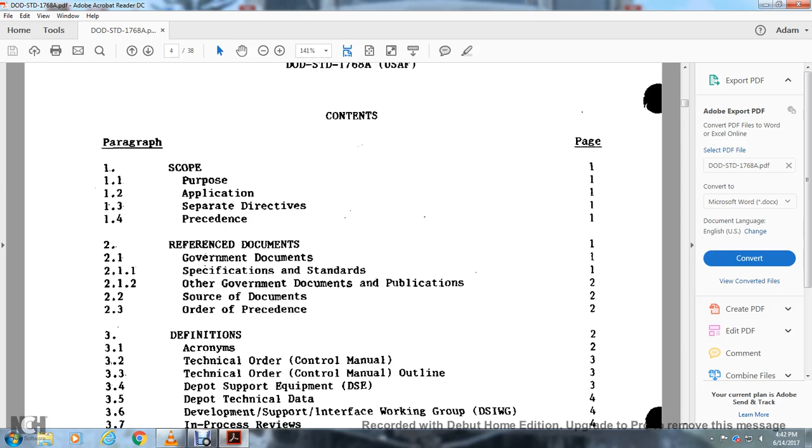Acronyms: Technical Order Control Manual, Technical Order Control Manual Outline, Depot Support Equipment, Depot Technical Data Development Support Interface Working Group, In-Process Reviews, Overhaul, Republication Reviews, Repair, Source Data, Support Data, Engineering Data, Technical Orders, Supplemental Data, Commercial Manuals, Technical Order Support Equipment, Technical Order Management Agency, Testing Station, Validation, Verification.

Section 4, General Requirements: Integrated Data Concept, Use of other TOs, Exchanging Source Data, Structuralizing, Specialized Packaging, Documentation Development, Interim Procedures, Interim Product Development, System Requirements and Analysis, Documentation, Quality Assurance, Configuration Accountability, Safety Critical Procedures, Air Force Occupational Safety and Health Requirements, Development and Process, Relationship with Depot.

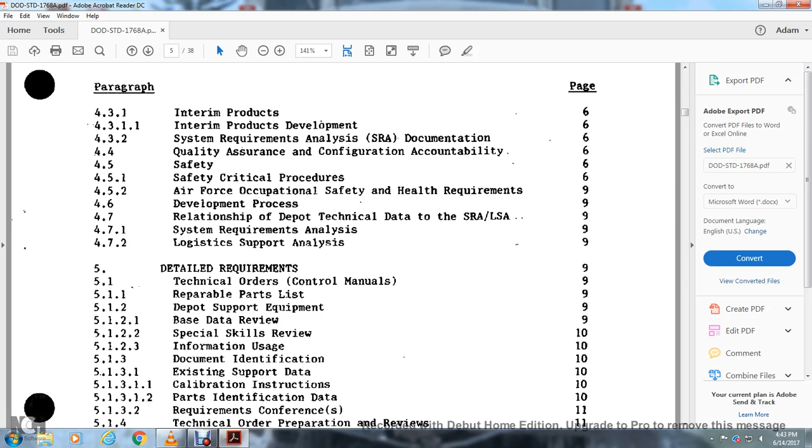Technical data for the SRA, LSA, System Requirements and Analysis, and Logistics Support Analysis. Detailed requirements: Technical Orders, Part Repairable Part List, Depot Support Equipment Base Data Review, the Special Skills Review, Information Usage, Document Identification, Existing Supporting Data, Calibration Instructions, Part Identification Data, the Requirements Conferences.

Technical order preparation: review of the Technical Order Control Manual and Outline, Technical Orders Control Manual, Technical Order Supplemental Data, Depot Technical Data Reviews, Validation, Verification of the Depot Technical Data, Validation, Correction of Deficiencies, Validation Certification, Verification, Technical Order Verification, Recommendation, Use of the Draft Copy, Verification Schedule, Depot Technical Data Verification, Complete Record Correction of the Deficiency, Verification, Approval.

Configuration control, preparation for delivery. Section 6, Notes: Intended use of the data requirement, subject term keyword listings, changes from previous issues.

Appendix A: Scope, purposes of applicability, reference documents, definitions, general requirements, content, type of data, extent of coverage and automation capability, data requirements, format, title page, list of effective pages, list and status of data to be verified, the TO, equipment configuration status record, C-page, table of contents, Section 1 Introduction, Section 2 Depot Functional Flow Charts.

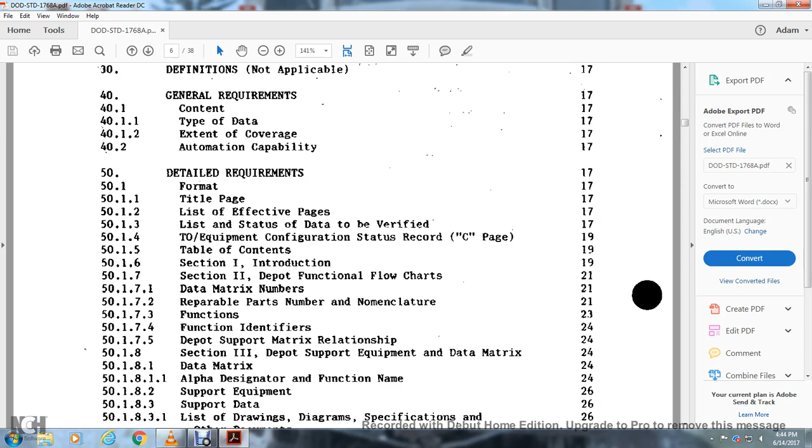Depot data matrix number, data repairable parts number, the nomenclature, function identifiers, depot support matrix relationship, Section 3 Depot Support Equipment, Data Matrix, Alpha Designator, Function Name, Support Equipment and Support Data, Listing of the Drawing, Diagram, Specification, and other Documents.

Figure 1, Depot Data Development Process; Depot Data Verification Completion Record; Depot Data Verification Recommendation. Example B: page list of data verified. Example C: Technical Order versus Equipment Configuration Accountability Record.

Example of Depot Functional Flow Chart. Example of Depot Support Matrix. Example of the Data Status List. Example of the Repairable Part Index. Tables: Depot Repairable List of Support Equipment, Depot Support Matrix Abbreviations.

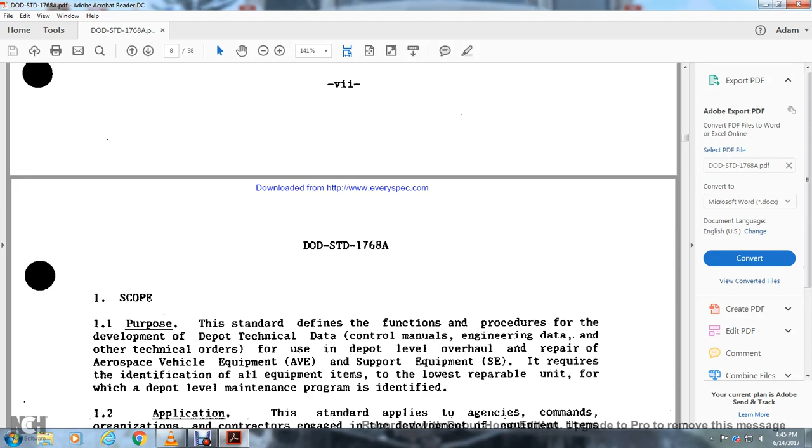Our Department of Defense Standard 1768A. Purpose: The standard defines the function and provides procedure for the development of the depot technical data, the manuals, the engineering data, and other technical orders.

For the use of the depot level to overhaul repairs of aerospace vehicle equipment and support equipment. It requires identifying all the equipment items in the lowest repairable unit for which a depot level maintenance program is identified.

Application of the standard: it applies with the agency's command or organization contracted to engage with the development of equipment items which require depot-level overhaul repair.

Separate directive: Separate directive operating procedures may be utilized to expand and implement specific requirements of the standard. This standard shall also apply to the procuring agency, as all procuring requirements shall clearly detail the intent with the integrated data concept.

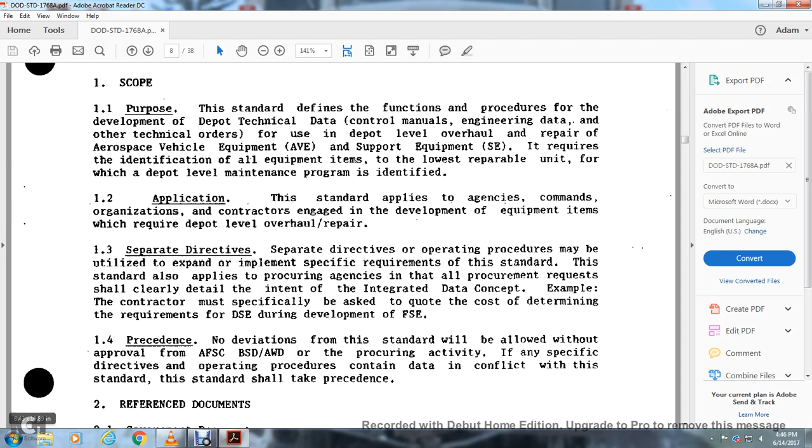For example, the contractor must specifically be asked to quote the cost of determining the requirements for the DSE and during the development of the FSE. Precedence: no deviation from the standard will be allowed without the approval of the Air Force AFSC, BSD, AWD, or the procuring activity. If any of the specific directives or operating procedures contain data in conflict with the standard, the standard shall take precedence.

Reference documents, government documents, 2.1.1, specification and standards. Unless otherwise specified, the following specifications and standards of the issue listed in the Department of Defense Index of Specifications and Standards specified in the solicitation form a part of this standard to the extent specified herein. The specifications: Military M-

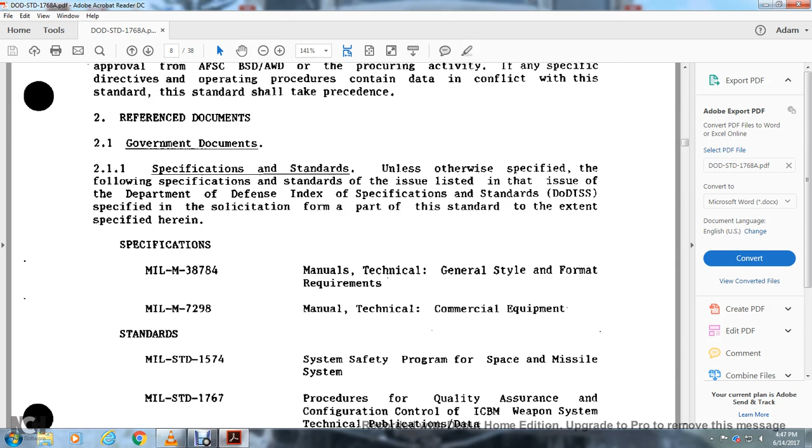38784, Manual Technical General Style and Format Requirements. MIL-M-7298, Manual Technical Commercial Equipment Standard. MIL-STD-1574, Safety Systems, Safety Programs for Space and Missile Systems. Military Standard 1767, Procedure for the Quality Assurance Configuration Control of the ICBM Weapon System Technical Publication Data.

Other government documents and publications: the following other government documents and drawings form a part of this standard to the extent specified herein. SAMSO Standard 77-6, System Requirements Analysis Program of the MX Weapon System. SAMSO Standard 79-1, Integrated System Safety Program for the MX Program. AFLC-R 66-17, The Depot Maintenance Support Plan.

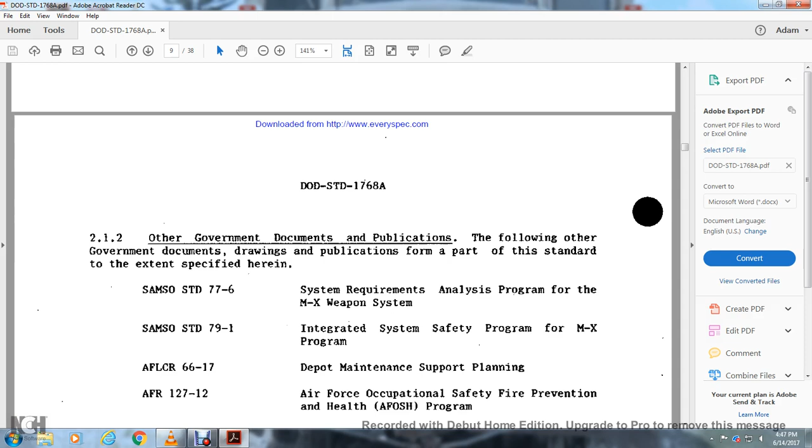AFR 127-12, The Air Force Occupational Safety and Fire Prevention Health Program. TO 00-5-1, Air Force Technical Order System. TO 00-5-2, Technical Order Distribution System. TO 00-2-1, Preventive Maintenance Program General Requirements and Procedures.

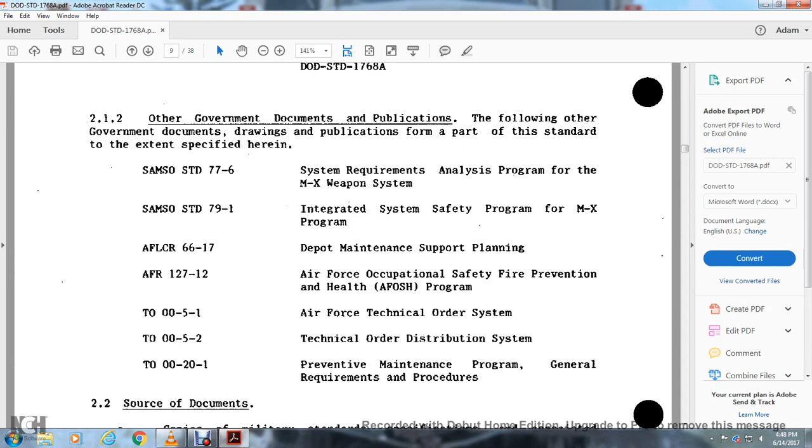Source for the documents: copies of the military standards and specifications associated with the Department of Defense Index of Specifications and Standards are available at the Department of Defense single stock point, with the Commanding Officer, Naval Publications and Forms Center, at 5801 Tabor Avenue, Philadelphia, Pennsylvania 19120. Copies of industry association documents should be obtained from the sponsoring industry association.

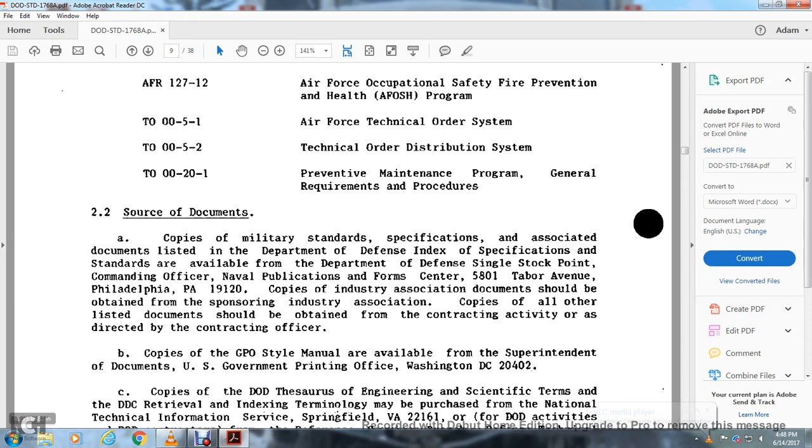Copies of all other listed documents should be obtained from the contracting activity as directed by the contracting officer. Copies of the GPO Style Manual are available from the Superintendent of Documents, U.S. Government Printing Office, Washington, D.C. 20402. Copies of the DoD Thesaurus of Engineering and Scientific Terms, the DDC Retrieval and Indexing Terminology, may be purchased from

the National Technical Information Service, Springfield, Virginia 22161. For DoD activities, DoD contractors, from the Reference Services Branch, Defense Technical Information Center, Cameron Station, Alexandria, Virginia 22304-6145.

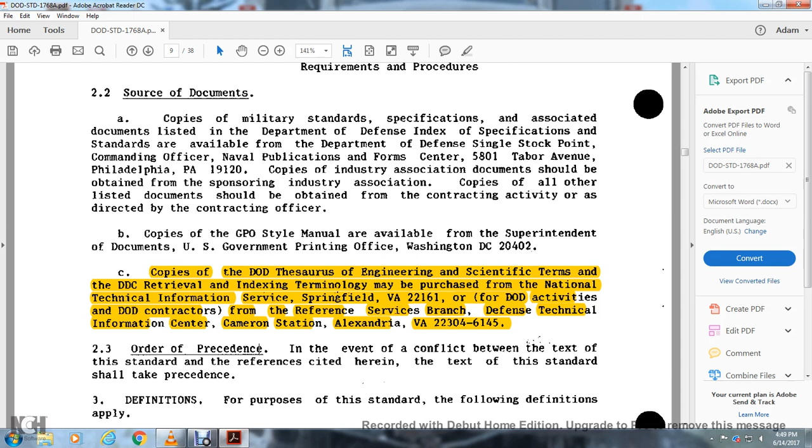Order of Precedence: in the event of a conflict between the text of this standard and the references cited herein, the text of the standard shall take precedence.

Alright, let me go. I'm just highlighting some of this, like...

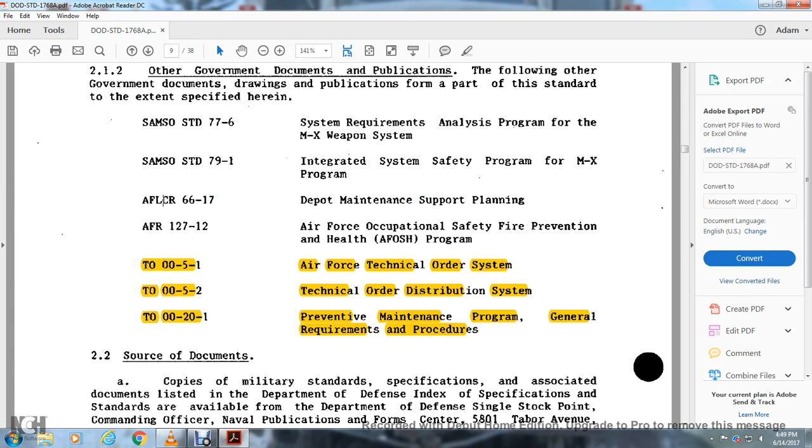Definitions: for the purpose of the standard, the following definitions apply. Acronyms: the following acronyms are used in this document.

A&CO TA, Assembly and Checkout Technical Analysis. AECO, Advanced Engineering Change Order. AFLC, Air Force Logistics Command. AFOSH, Air Force Occupational Safety and Health. AFSC, Air Force Systems Command. AFOTEC, Air Force Operational Test and Evaluation Center. ALC, Air Logistics Center. AVE, Aerospace Vehicle Equipment.

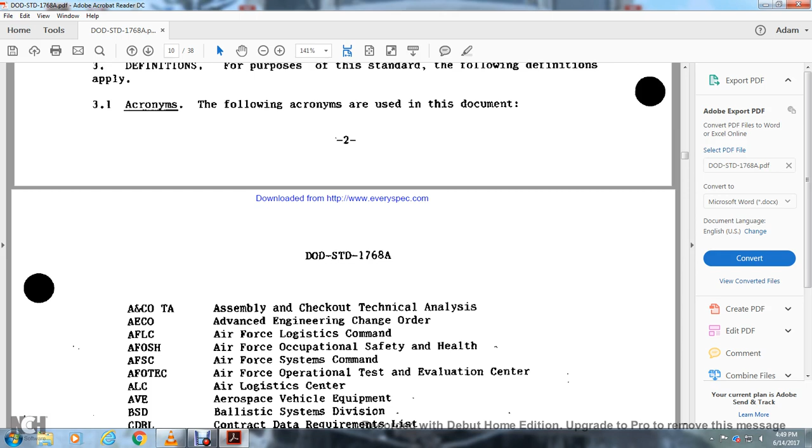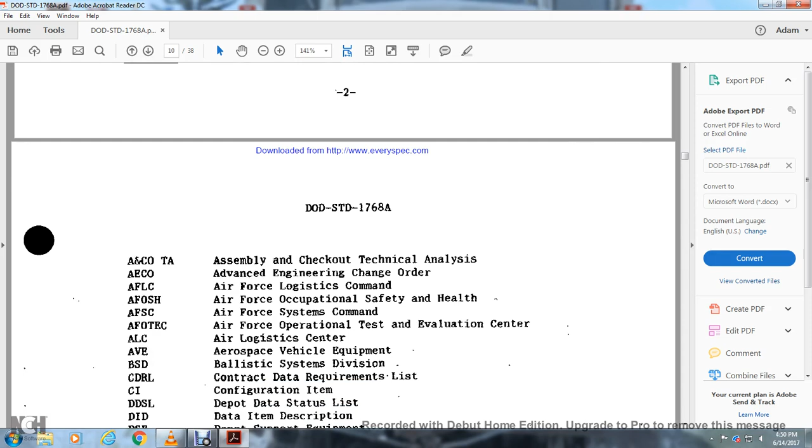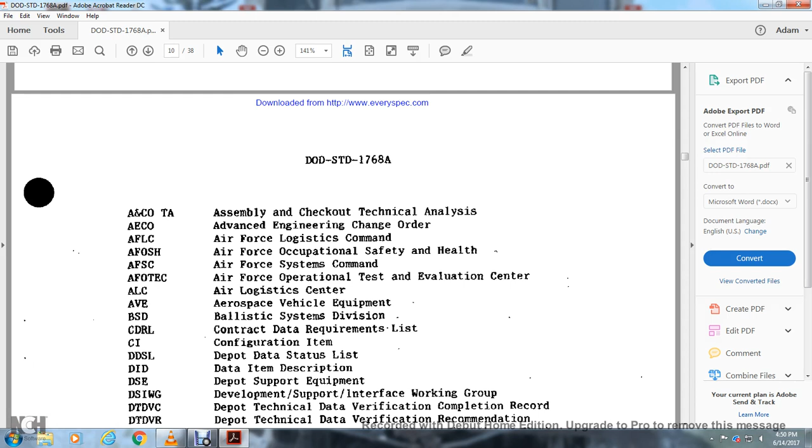BSD, Ballistic Systems Division. CDRL, Contract Data Requirements List. CI, Configuration Item. DDSL, Depot Data Status List. DID, Data Item Description. DSE, Depot Support Equipment. DSIWG, Development Support Interface Working Group. DTDVC, Depot Technical Data Verification Completion record. DTDVR, Depot Technical Data Verification Recommendation. ECP/ECN, Engineering Change Proposal, Engineering Change Notice.

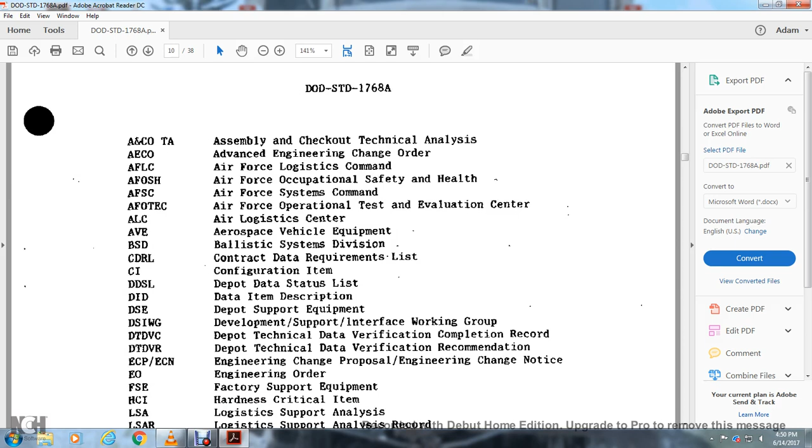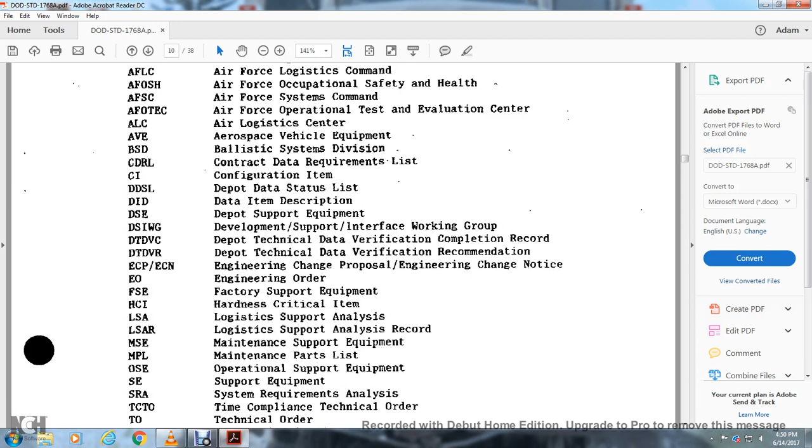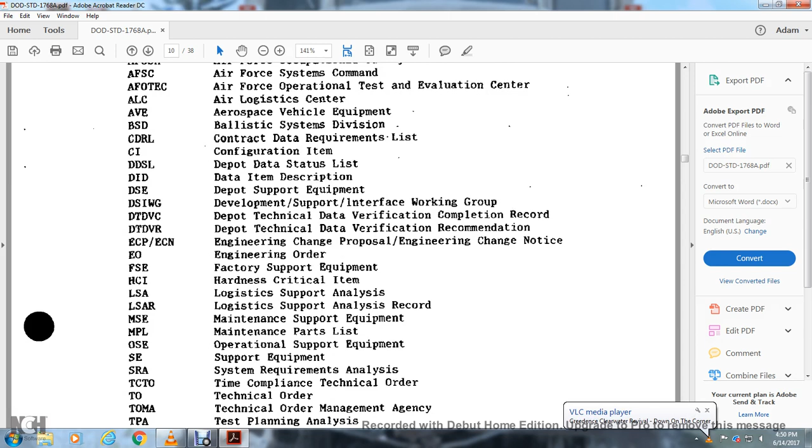EO, Engineering Order. FSE, Factory Support Equipment. HCI, Hardness Critical Item. LSA, Logistics Support Analysis. LSAR, Logistics Support Analysis Record. MSE, Maintenance Support Equipment. MPL, Maintenance Parts List. OSE, Operational Support Equipment. SE, Support Equipment. SRA, System Requirements Analysis. TCTO, Time Compliance Technical Order. TO, Technical Order. TOMA, Technical Order Management Agency. TPA, Test Planning Analysis. TRC, Technology Repair Center.

TOCM, Technical Order Control Manual. The technical order prepared according to the standard MIL-M-38784 for incorporating support data, with the Technical Order Control Manual identifying the overhaul, all depot overhaul, and repair of the tasks required, with the preferred sequence of support equipment and special tools, task equipment, consumables, and a list of other support data required to accomplish each of the tasks, providing a means of determining the configuration of the support data and equipment.

Technical Order Control Manual outline: an outline is a method of organizing the material content of the control manual into a logical, sequential manner by section and paragraph breakdown prior to finalization into a written and printed document. Depot support equipment: classes of equipment, excluding common hand tools, necessary to overhaul, repair, and test contractor hardware to the lowest repairable unit. This includes commercial equipment.

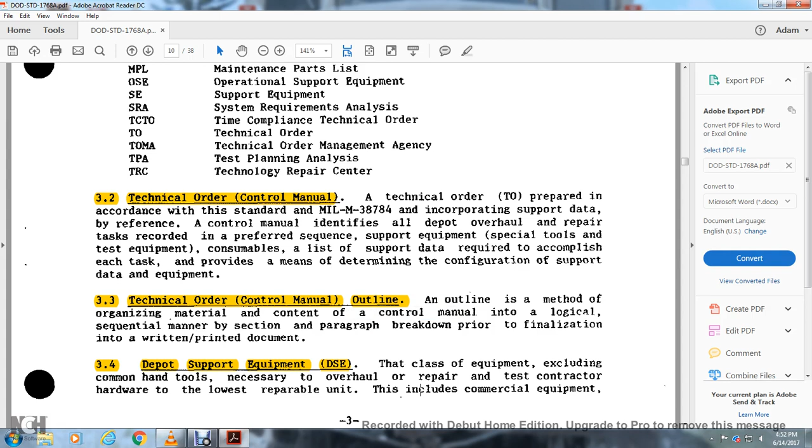This includes commercial equipment as well as equipment specifically designed or built to fulfill the particular depot overhaul repair function. The depot technical data documentation control manual covers the supplemental data, engineering data, and other technical orders, used during the depot level maintenance on AVE and SE. This control manual will identify the function of the repair, install, calibrate, etc. to be performed with the AVE or SE, directing the technician to the appropriate data to perform the function.

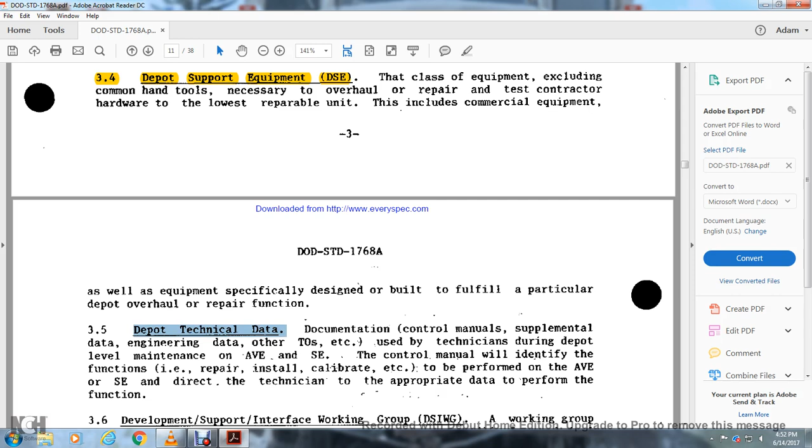The Development Support Interface Working Group, the DSIWG, consists of representatives of each agency responsible for technical development, established by the Technical Order Management Agency. The plan and schedule coordinate the technical publication data and the development acquisition. The DSIWG will establish the operating procedure to develop and monitor the technical publication program schedule, continuously monitoring program events to ensure technical publication data are scheduled and available to support various program events.

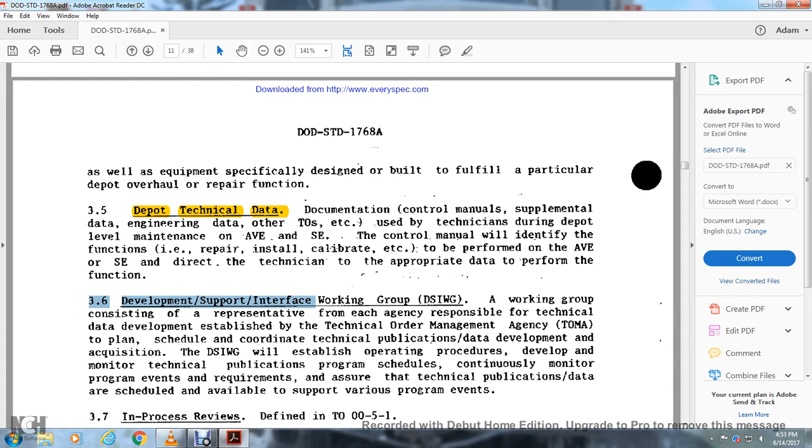In-process reviews are defined in TO 0051. Overhauls are defined in TO 00201. Prepublication reviews are in TO 0051. Repair is defined in TO 00201.

311, support source data. The documentation developed with the contractor for support equipment and items developed with contractor source data may be standalone, may incorporate other documentation when the hardware is integrated or attached, or otherwise become part of the equipment support. 312, support data, 312.1 engineering data delivered to the Air Force, prepared by the contractor to support hardware manufactured, developed, and produced by the contractor.

This includes current engineering drawings with schematic diagrams, logic diagrams, process specifications, testing specifications, vendor development drawings, procedures, and acceptance procedures. These data are in a form of existing data developed in support of the contractor requirements.

Technical order supplemental data: the data from the contractor, where it has been determined there is no existing data or existing data is determined inadequate. Reference 5143. Such data contains the title, the list of effective pages, and table of contents.

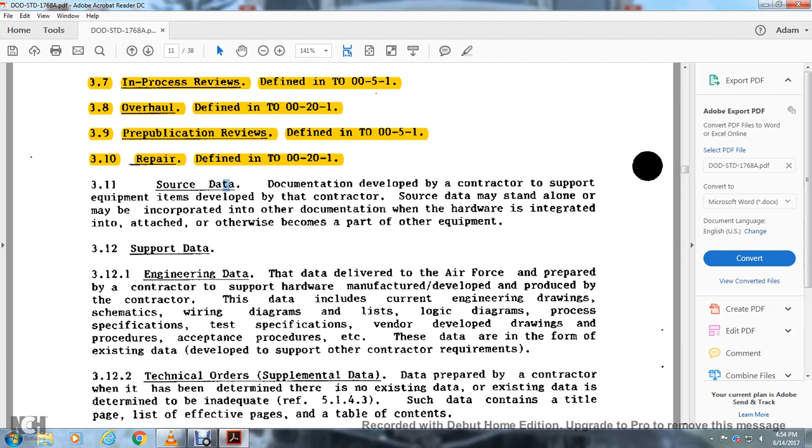Notice submitted at the early stages of procurement, with vendor notice that should be prepared and submitted in accordance with MIL N7384.

Technical order defined in TO 0051. Support equipment defined in TO 00201. Technical Order Management Agency, TOMA.

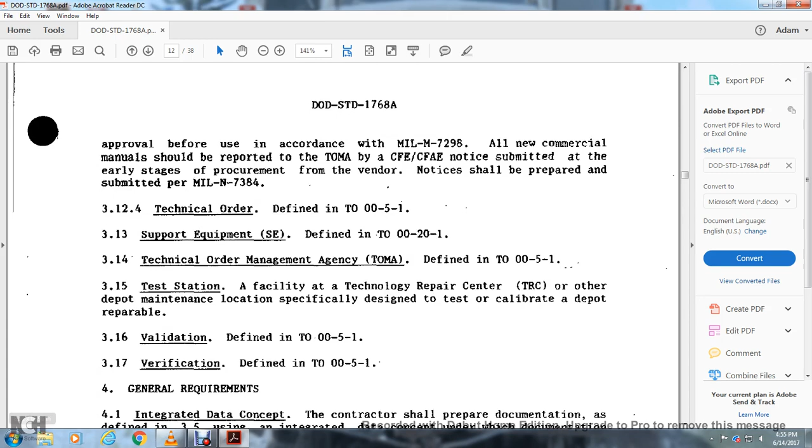Defined in technical order 00-5-1: a testing station facility at the Technology Repair Center, or other depot maintenance location, specifically designed to test and calibrate items to be depot repairable. Validation and verification are both defined in TO 00-5-1. General requirements.

Section 4, Integrated data concept. The contractor shall prepare the documentation as defined in 3.5 using the integrated data concept, within which documentation required to support a function and task element may be used for more than one application, developed only one time during design, for factory support equipment and the software.

The contractor will determine the requirements of the DSE operation maintenance data for the factory support equipment that is identified with the transition to the depot, and depot support equipment developed by the contractor to enable the depot technical data.

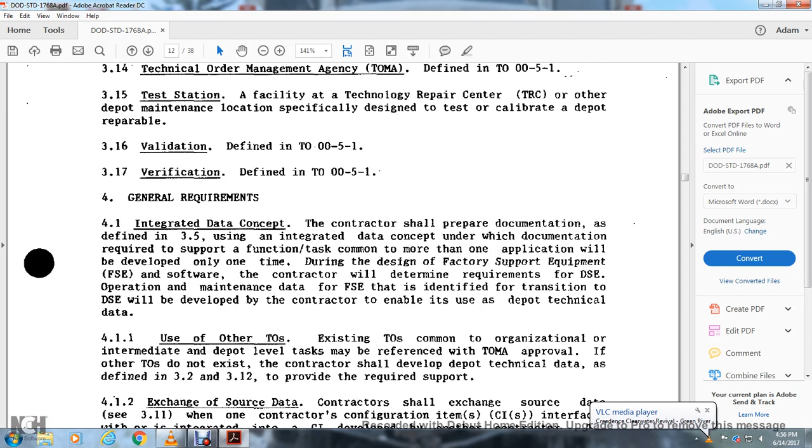4.1.1, use of other TOs. If the existing TO is commonly used at organizational, intermediate, or depot level tasks, it may be referred to, subject to Technical Order Management Agency approval. If the TOs do not exist, the contractor should develop the depot technical data as defined in 3.2 and 3.12, providing the required support.

4.1.2, exchange of source data. The contractor shall exchange source data of contractor configuration items, or CI, that interface with or integrate with CI configuration items developed by another contractor.

The contractor responsible for the integrated data shall identify the contributing contractor, along with the contractor responsible for providing the source data, at the specific time, format, and submittal dates required for integration. Exchange of source data shall be coordinated through technical interchange meetings or other mutual arrangement means. Problems involved in the exchange of source data shall be identified to the Technical Order Management Agency for resolution.

4.2, Structuring. The technical order control manuals will be structured in packages to support the Air Force Logistics Command with the TRC concept as defined in AFLC-R 6617. However, to the extent possible, the contractor shall ensure flexibility in structuring to allow for possible relocation of TRC responsibility.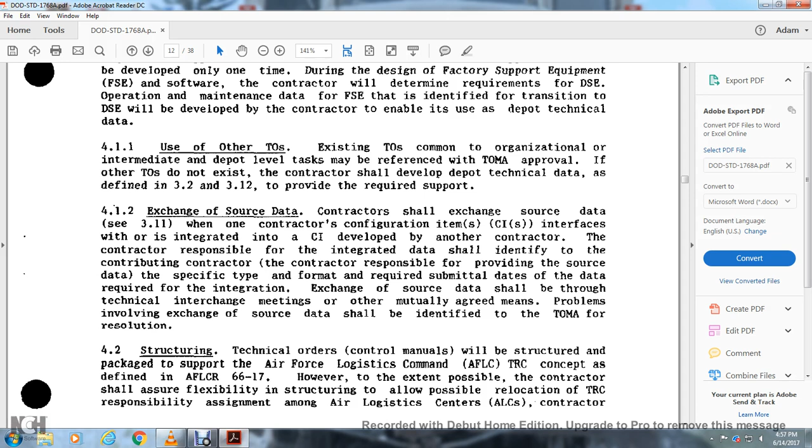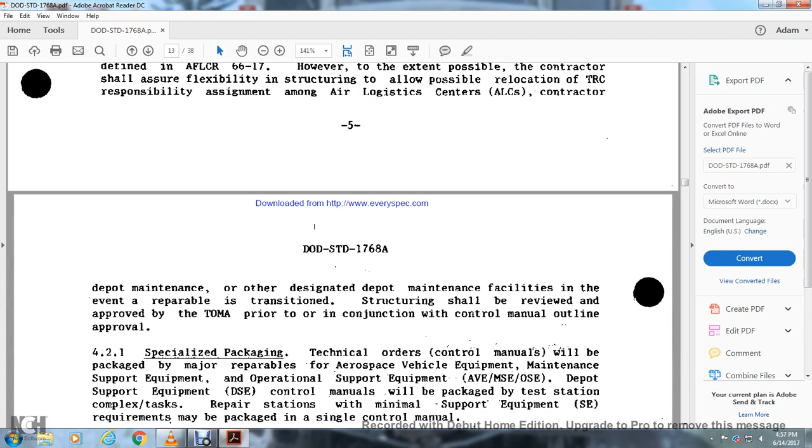This includes assignment by the Air Force Logistics Command or Air Logistics Centers and contractor depot maintenance to designated depot maintenance facilities. In the event a repairable is transitioned, the structure shall be reviewed and approved by the Technical Order Management Agency prior to, or in conjunction with, the control manual outline approval.

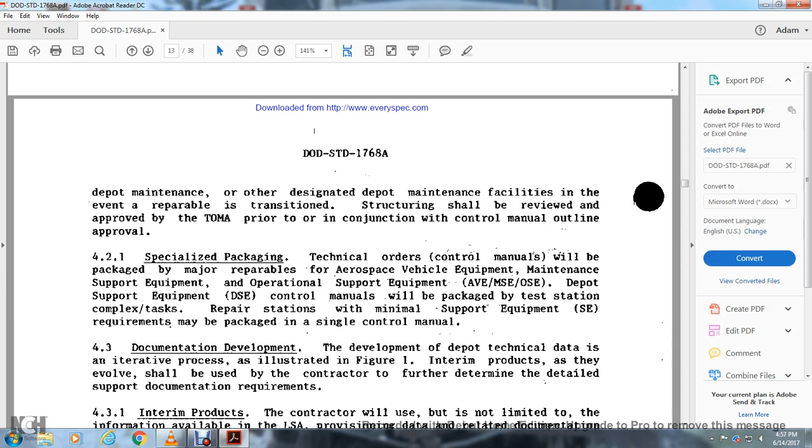Specialized packaging. Technical order control manuals will be packaged with major repairable aerospace vehicle equipment, maintenance support equipment, operational support equipment, and depot maintenance support equipment. The control manuals will be packaged for test stations, complex test tasks, and repair stations with minimal support equipment requirements, which may be packaged in a single control manual.

4.3. Documentation development. The development of depot technical data is an iterative process illustrated in Figure 1. Interim products as they evolve should be used by the contractor to further the determination of the detailed support documentation requirements.

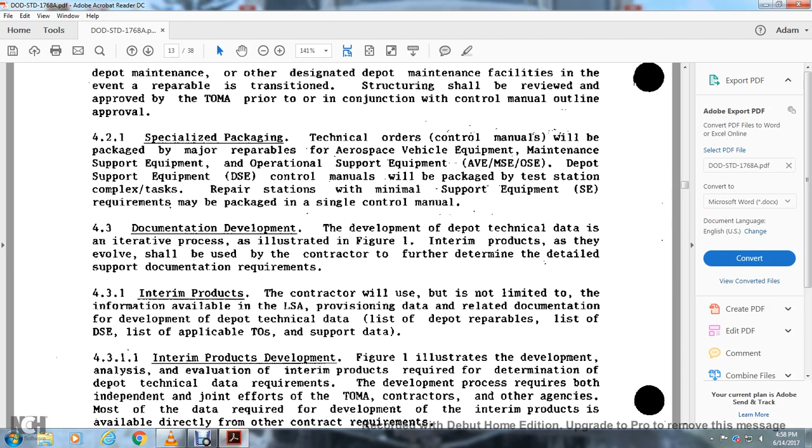The contractor will use, but not be limited to, information available to the logistics support analysis, provisioning data and related documentation for the development of the depot technical data list, the list of depot repairables, the depot support equipment list, and applicable technical orders and support data.

4311. Interim product development. Figure 1 illustrates the development, analysis, and evaluation of interim products required for determination of depot technical data requirements. The development process requires both independent and joint efforts from the technical order management agency, contractors, and other agencies. Most of the data required for development of the interim products is available directly from other contract requirements.

Logistics support analysis. 4.4. Quality assurance and configuration accountability. The contractor shall plan for a program for in-house quality assurance, configuration control of the technical publication data in accordance with the contractual requirements of the procuring activity.

4.5. Safety. Each testing, operation, and maintenance procedure prepared by the contractor including computer-controlled test sequences will be reviewed by the ballistic system division, system safety division, or representative designated by the procuring agency.

451. Safety critical procedures. The testing, operating, and maintenance procedures prepared by the contractor that involve or affect safety will be designated as safety critical procedures. Safety critical procedures will be approved by the ballistic system division, system safety division, or representative designated by the procuring activity, as outlined in Military Standard 1574, during in-process verification and pre-publication review.

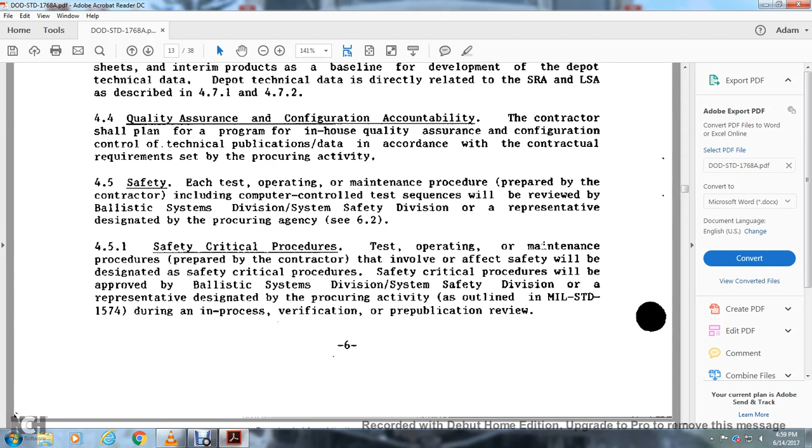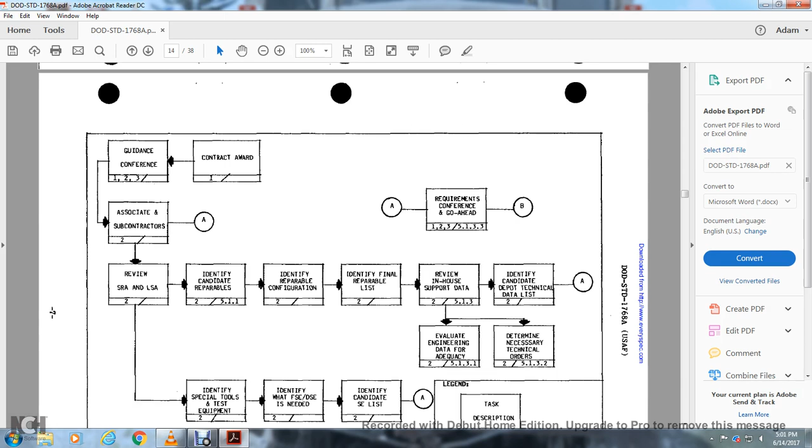A is requirements conference, go ahead, and then back to the review from the contract award guidance conference, the associated subcontract review of the support requirements and the logistics support analysis. Identify special tools, testing equipment, identify the FSE and depot support equipment needed, identify the candidate's support equipment list, and the legend task.

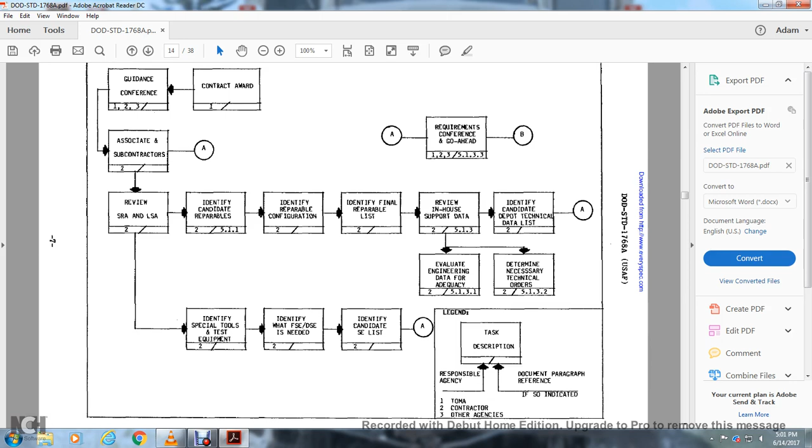This is the task description, responsible agency, document paragraph reference. One is the technical order management agency, two is the contractor, three is other agencies. A stands by itself, the end of requirements conference, go ahead.

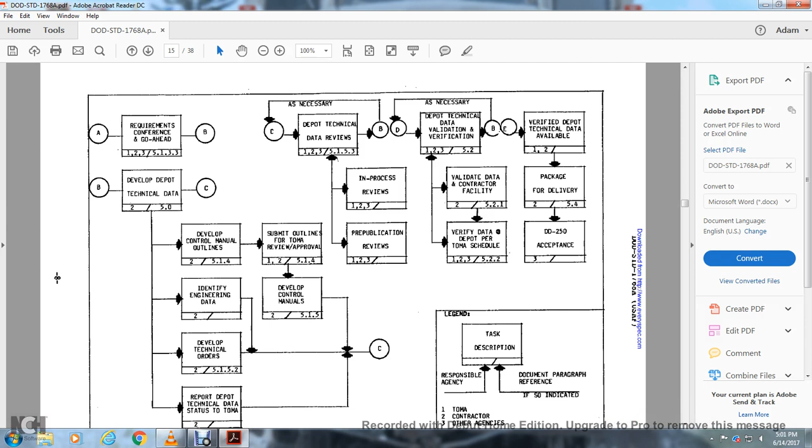From B, you have the development of technical data springing into four different lines. The first is the development control manual outlines, which splits into submitted outlines for technical order management agency review and approval of development control manuals, which converts into C. After that, you identify engineering data that goes straight to developing technical orders and C, and reporting depot technical data status, technical order management, is C.

As necessary, in B, the depot technical data reviews split into in-process reviews and pre-publication reviews, while D is, as necessary, depot technical data validation and verification, validate data at contractor facility, verify data at depot per technical order management agency schedule, and E is verified depot technical data available packaged for delivery and DD-250 acceptance.

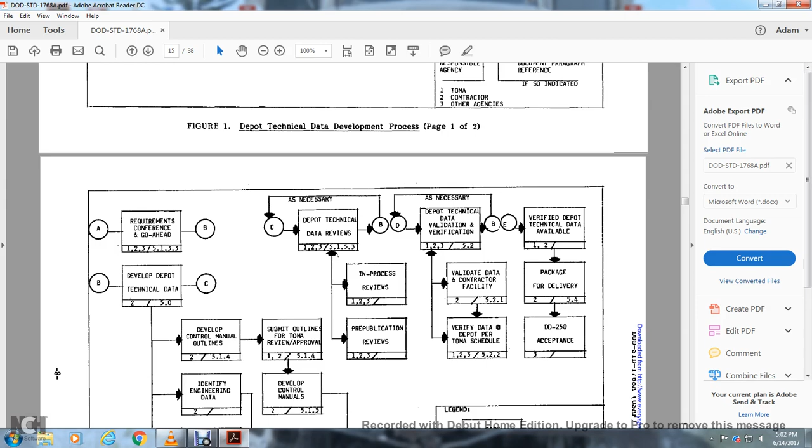Same thing with this task description, responsible agency, document paragraph reference, if so indicated. One is the technical order management agency, two is the contractor, three is other agencies.

Air Force Occupational Safety Health, AFOSH requirements. Technical order supplemental development. The supplemental data will be reviewed and ensured compatible with the Air Force Occupational Safety Health requirements according to SASMO Standard 79.1 and AFR 127-12.

The development process: develop adequate, accurate depot technical data through a viable process where all elements impacted are documented, reviewed and analyzed. Although it is a progressive process, it will be necessary to revisit some steps as the effort continues.

The relationship of the depot technical data with the system requirement analysis and logistics support analysis. System requirement analysis is comprised of the operational logistics support analysis, test planning analysis, and the assembly checkout and technical analysis.

The system requirement analysis, defined in SASMO Standard 77.6, is a systematic approach to establishing and optimizing requirements for equipment, personnel, procedures, and facilities, compared against the baseline of the proposed system change to be evaluated.

472, logistics support analysis. The logistics support analysis prescribes the total research of tools and support equipment, technical data, spares, and personnel, etc., required to maintain the weapon system's operational mode.

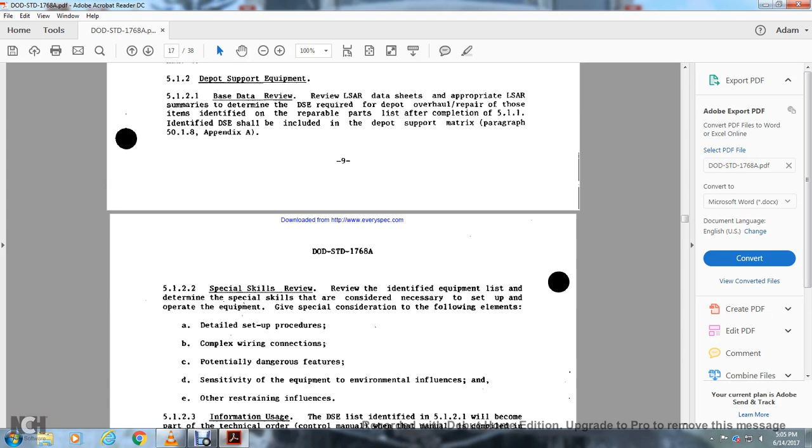5122, special skills review. Review the identified equipment and determine special skills considered necessary to set up and operate the equipment, giving special consideration to the following elements: detailed setup procedures, complex wire connections, potential dangerous features, sensitivity of the equipment to environmental influences and other restraining influences.

5123, information on the depot support equipment listed and identified in 5121 will become part of the technical order control manual when the manual is compiled in accordance with 515.

513, document identification, using the results of 511 and 512, identifies the documentation required to perform the depot maintenance of items identified on the repairable part list. 5131, existing supporting data: review the existing supporting data as defined in section 312, determine which can be used to satisfy the depot maintenance requirements for items identified on the repairable part list.

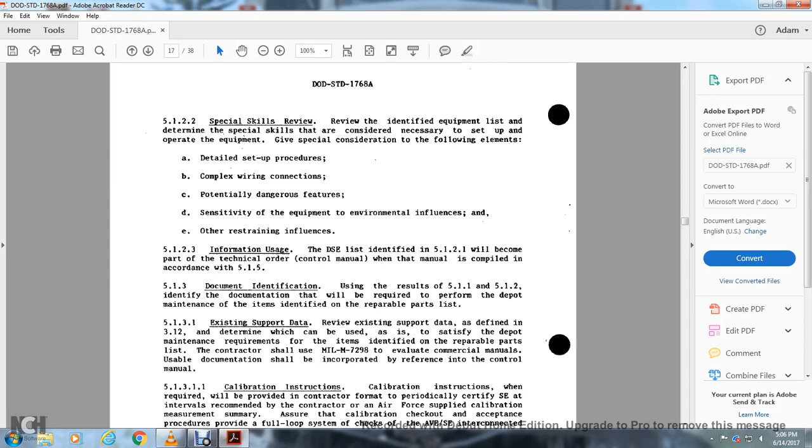The contractor should use MIL-M-7298 to evaluate commercial manuals. Usable documentation shall be incorporated by reference into the control manual.

51311, calibration instructions. The calibration instructions, when required, will be provided in contractor format that periodically certifies the support equipment at the required intervals, as recommended by the contractor or an Air Force, supplied with the calibration measurement. The summary ensures the calibration checkout acceptance procedure is provided with the full loop system to check the AVE/SE interconnected configuration, where such checks are required.

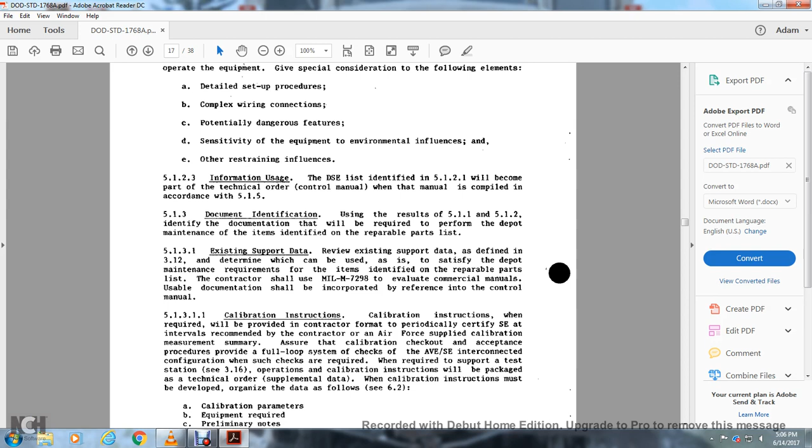When required, with the support test station, the operation and calibration instruction will be packaged as technical order supplemental data. The calibration instruction must be developed and organized to include: the calibration parameters, equipment required, preliminary notes, safety and clean room requirements, special requirements, and detailed step-by-step calibration procedure.

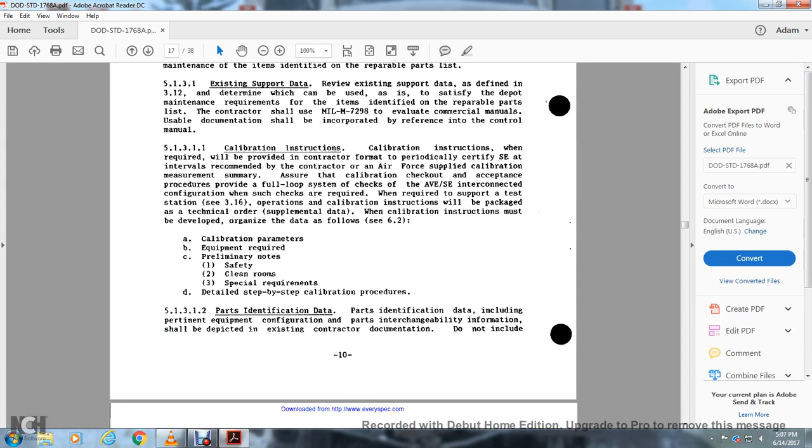51312, part identification. Part identification data including pertinent equipment configuration and part interchangeability information shall be documented as depicted in existing contractor documentation. Do not include the maintenance parts list (MPLs) unless an unusual problem might exist in identifying parts for procurement, through use of existing technical order or contractor documentation, or as specifically approved by the Air Force Systems Command with the Air Force Logistics Command agencies.

5132, requirements conference. The technical order management agency will schedule and conduct with the depot technical data requirements conferences, with the purpose of reviewing the candidate depot technical data required. Recommended by the contractor, shall participate in the requirements conference, shall assist with resolution of all comments and objections arising during the conference. During the conference, the contractor shall offer consideration and identification of existing or proposed incorporation by reference into the technical orders control manual, with identification of proposed technical order with supplemental data developed per 5143.

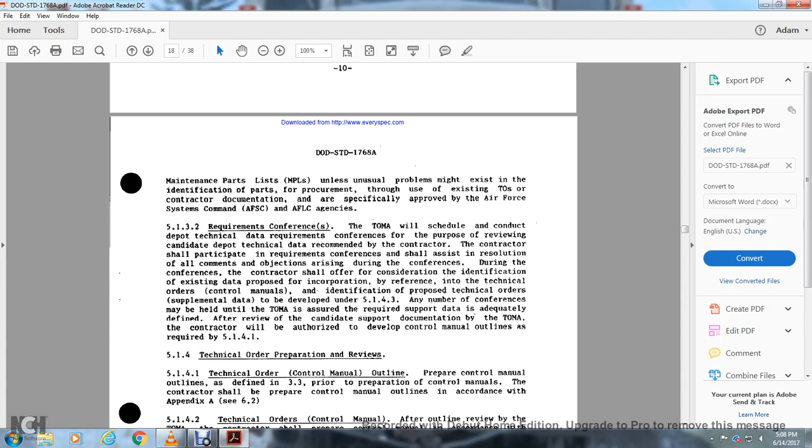Any number of conferences may be held until the technical order management agency is assured that the required support data is adequately defined after review of the candidate supporting documentation by the technical order management agency. The contractor will be authorized to develop the control manual outlines as required in section 5141. Technical order preparation reviews.

5141, technical order control manual outline. The contractor shall prepare the control manual outline as defined in section 3.3 for preparation of the control manual, in accordance with appendix A62.

5142, technical order control manual. After outlines are reviewed by the technical order management agency, the contractor shall prepare a control manual in accordance with appendix A62. 51421, support data. During the preparation of the technical order control manual, incorporate the applicable existing support data by reference into the control manual. 5143, technical order supplemental data.

The prepared supplemental data, as defined in section 312, during preparation of the control manual, will incorporate other documentation by reference in the control manual. Such technical orders will contain the title page, list of effective pages, table of contents, conforming to MIL-M-38784.

The technical data to be performed in the contractor format shall include warnings, cautions, and notes to conform with MIL-M-38784, C62.

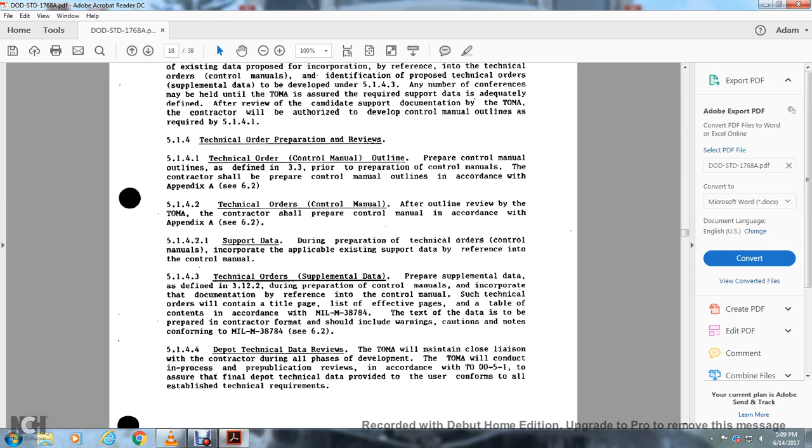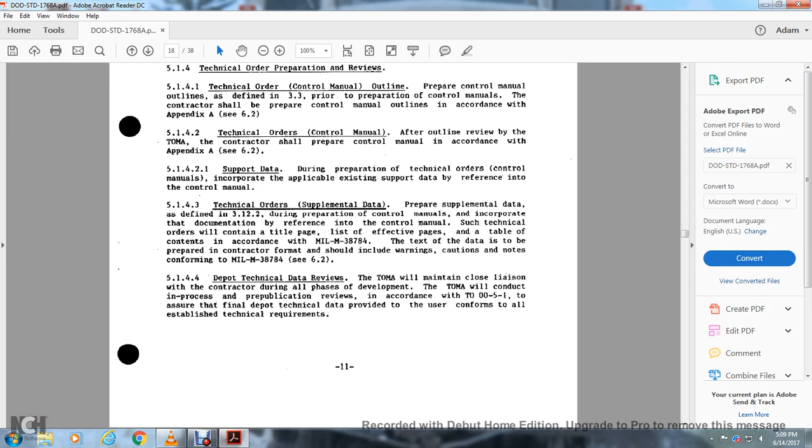5144, Depot Technical Data Review. The Technical Order Management Agency will maintain close liaison with the contractor during all phases of development, and will conduct in-process and pre-publication reviews in accordance with technical order TO 00-5-1 to assure the final depot technical data provided to the user conforms to all established technical requirements.

5.2, Validation and Verification of Depot Technical Data. Validation: the contractor shall validate the control manual and supplemental data, referencing supporting documentation, in accordance with technical order TO 00-5-1. Validation shall be performed at the contractor facility or any other designated facility where adequate repairable support equipment is available, using qualified technicians in accordance with the tasks specified in the supporting data.

For repairable items to which the data applies, observation of the support equipment identified in the data by the Air Force is optional; the contractor shall be responsible for notification. Validation shall allow the technical order management agency to designate a representative to witness the validation. Such witnessing of scheduled validation shall not restrict the contractor's validation accomplishment.

5211, correction of deficiencies. The contractor shall correct deficiencies identified during validation prior to the beginning of verification. 5212, verification and certification. The contractor shall provide certification of validation requested by the Technical Order Management Agency prior to verification, per 6.2.

5.22, verification. Verification will be accomplished in accordance with technical order TO 00-5-1. Depot technicians may normally be assigned to appropriate AFLC repair areas to demonstrate that the depot technical data, repairables, and support equipment are compatible. 5221.

Technical order verification recommendation. The Technical Order Management Agency shall prepare the depot technical verification recommendation list at the conclusion of validation. See Figure 3 for a sample of the depot technical data verification recommendation. The detailed depot technical data verification recommendation is subject to concurrence or modification by the Technical Order Management Agency or the Air Force Logistics Center, using the draft copy.

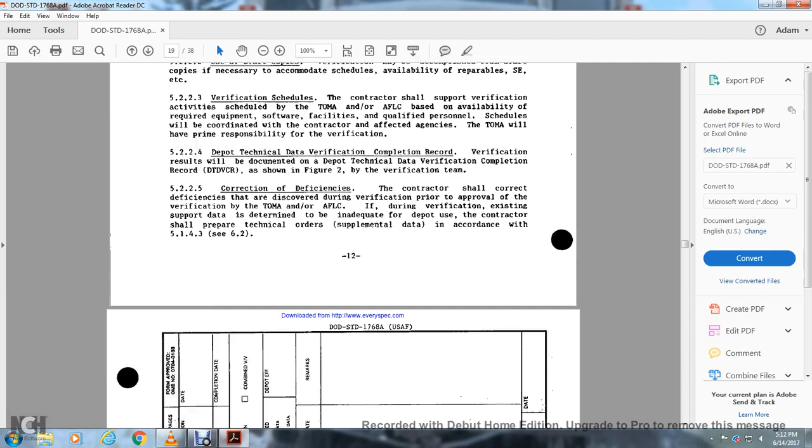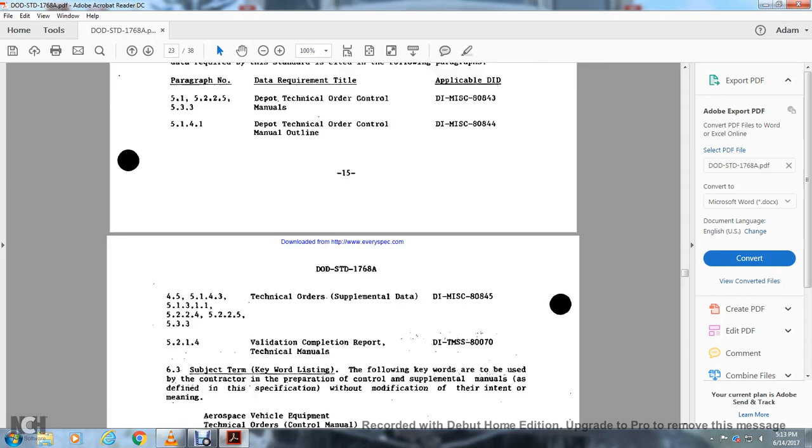The contractor will prepare the change or revision, as dictated by changes in the equipment, the procedure, and the technical order control manual. The technical order supplemental data is prepared with the standard, shall be changed or revised in accordance with TO 00-5-1, see 6.2.

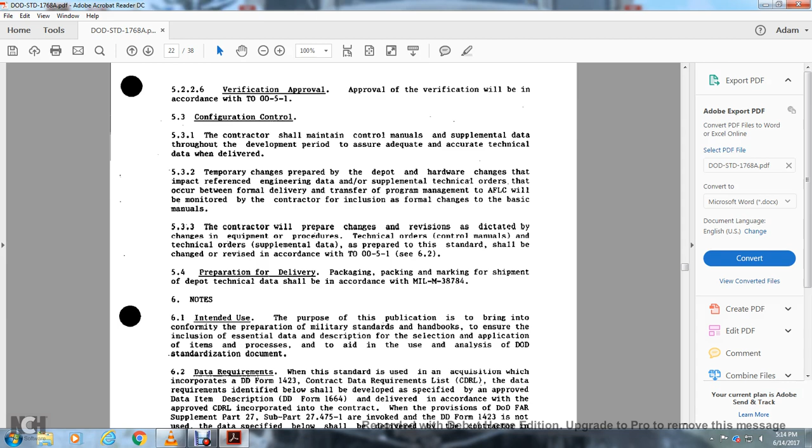Preparation for delivery: the packaging and marking for shipment of the depot technical data shall be in accordance with MIL-M-38784.

Notes are intended to be used for the purpose of bringing publications into conformity with the preparation of military standard handbooks, to ensure the inclusion of essential data and description for the selection and application of items and processes, and to aid in the use and analysis of Department of Defense standard documentation.

6.2 Data requirements. When the standard is used with the acquisition incorporating DD Form 1423 Contract Data Requirements List (CDRL), the data requirements identified below shall be developed and specified with an approved data item description, DD Form 1664, developed in accordance with the approved contractor data requirements list incorporated in the contract, with the provision of DoD FAR Supplement Part 27 Subpart 27.475-1 invoked. If DD Form 1423 is not used, the data specified below shall be delivered by the contractor in accordance with the contractor purchase order. The deliverable data required by this standard is cited in the following paragraphs:

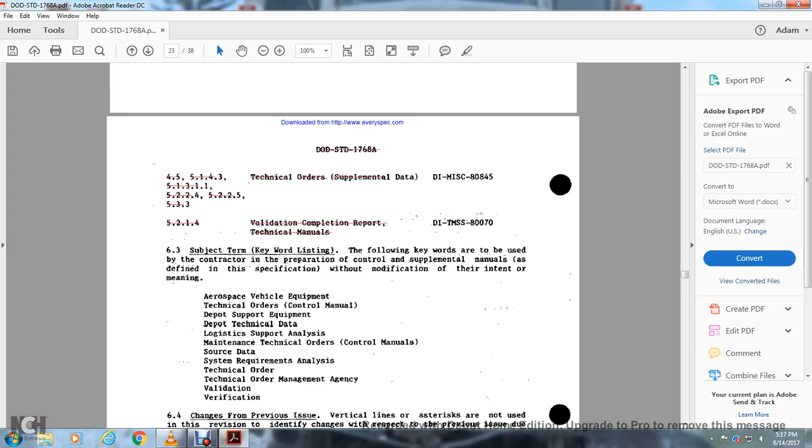Subject terms, the keyword listing: the following keywords are to be used with the contractor preparation, control, and supplemental manuals that define the specification without modification. They are intended to mean: aerospace vehicle, technical order, control manual of the depot, support equipment, depot technical data, logistics support analysis, maintenance technical order, the control manual, source data, system requirements analysis, technical order management, agency validation, verification.

6.4 Changes from previous issue: a vertical line with margin asterisks are not used in this version to identify changes with respect to the previous issue due to the extensive nature of the change.

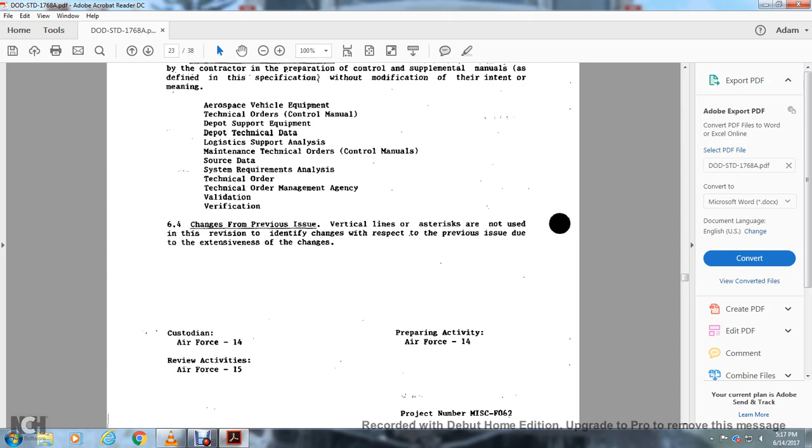Custodian: Air Force 14. Review activities: Air Force 15. Preparing activity: Air Force 14. Project number: MISC-F062, Appendix A.